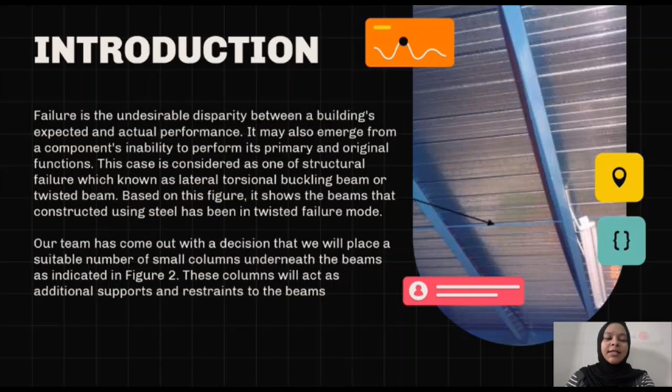Based on this figure, it shows that the beams constructed using steel have been in twisted failure mode. Therefore, our team has come out with the decision that we will place a suitable number of small columns underneath the beams as indicated in figure 2, and these columns will act as additional support and also restraint to the beam. Next, we'll move on to the metric investigation.

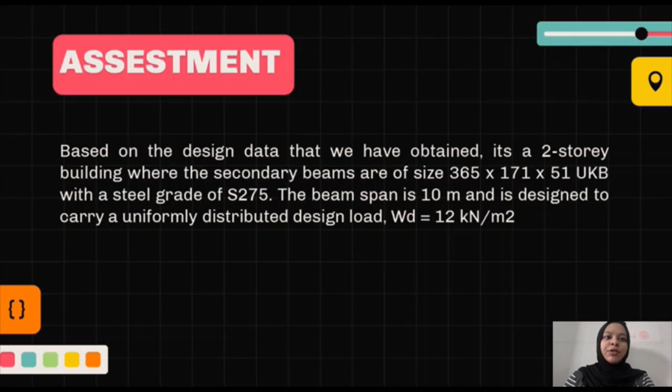For this assessment, based on the design data that we have obtained, it is a two-story building where the secondary beams are size 356 x 171 x 51 UKB with a steel grade of S275. The beam span is about 10 meters and is designed to carry a uniformly distributed load of 12 kN per meter square. As for the material evaluation, steel is a ductile material, hence even though the load has been predicted, forces in different members have been calculated and designed to resist particular forces. However, it still tends to fail due to some unpredicted load that makes the force in certain members increase to a value which it cannot withstand.

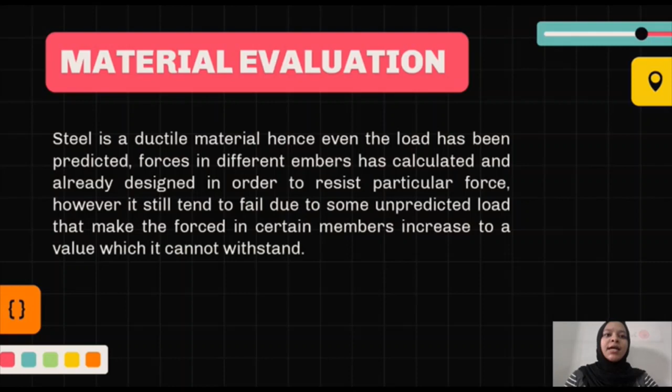As for the hypothesis of beam stiffness, for many different types of structure, especially those with slender geometries, the idea of beam stiffness is crucial. Large deflection as well as significant localized stresses and the possibility of failure in that area might result from insufficient beam stiffness. Such construction may also be vulnerable to torsional moments, which are twisting moments. In addition to bending moments or torques, the product EI is a measure of how strongly the beam resists deflection under bending moments. For a given material, the beam stiffness is maximized by maximizing the value of I.

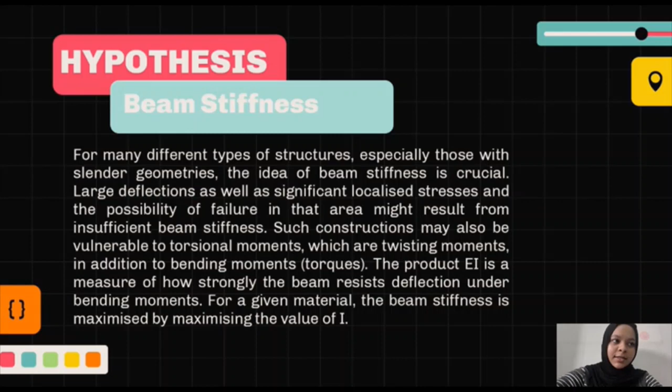The next hypothesis is that the compression flange of the beam is not restrained. The main cause of the torsion is when the compression flange of the beam is not restrained. We believe that when we apply a load to a beam, it is applied precisely at the beam center. However, this is not always the case in practice. The loads are present on the floor and these loads are always eccentric. Because the flange of the beam is not fixed, this eccentricity causes a twisting moment that causes the beam to move laterally as well as twist.

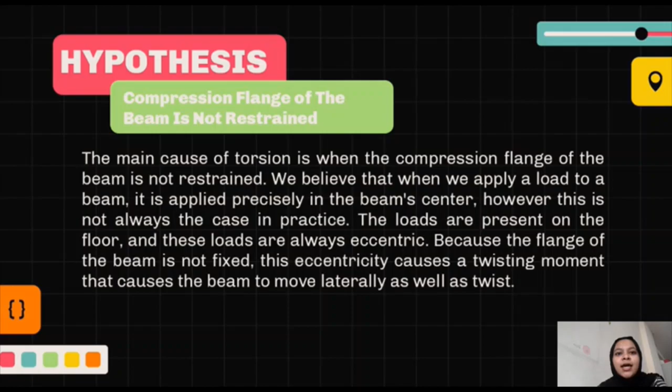Today I will present the calculation part of this project. For the calculation part, we have two methods, which are the moment distribution method (MDM), and the second is the critical bending moment (MCR). For the MDM, we have several steps. First, calculate the member stiffness. Second, calculate the DF. Third, calculate the carryover factor. The fourth step is to calculate the FEM, and last, prepare the distribution table to summarize the final moment.

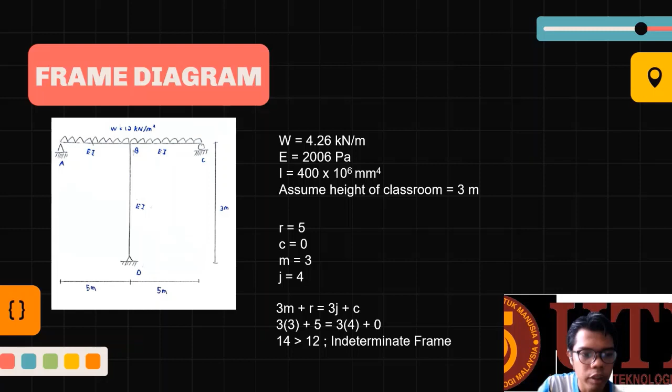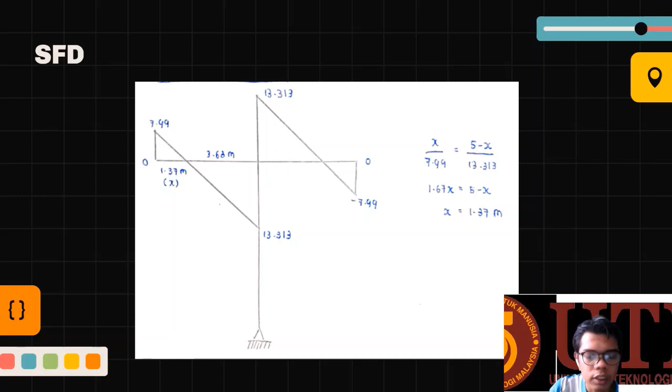In this diagram, we can see the frame diagram. With our group calculation, we determined that the frame is an indeterminate frame, and our group proposed for the framing diagram to be one column with a pin and moment. Next is the calculation part for the FEM. After the calculation of FEM, our group used the table to get the final moment at every joint, and from there we find the reaction at every joint, and we sketch the SFD based on the shear force diagram.

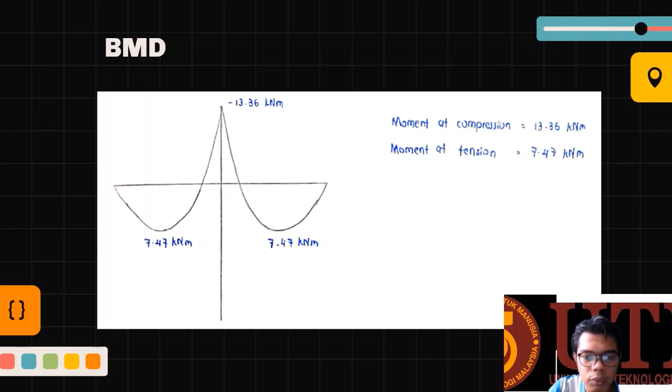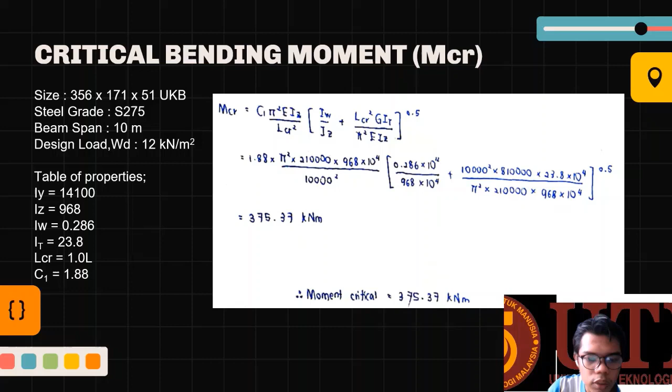Next, we sketch our bending moment diagram and find the moment at compression, which is 13.36 kNm, and the moment at tension, which is 7.47 kNm. The critical bending moment (MCR): in this project, we use the size of 356 x 171 x 51 UKB with a steel grade of S275. The design loading is 12 kN per meter squared, and based on the table of properties, we get our MCR, the critical moment, equal to 375.37 kNm.

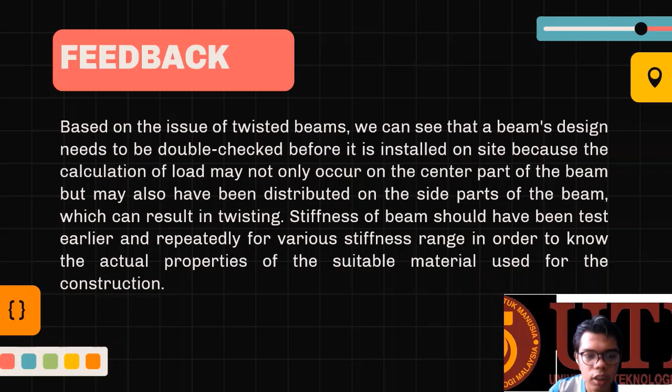Moving on to the discussion part. Based on the issue of the twisted beam, we can see that a beam design needs to be double checked before it is installed on site, because the load may not only occur at the center part of the beam, but may also be distributed on the side part of the beam, which can result in twisting. The stiffness of the beam should have been tested earlier and repeated for various stiffness ranges in order to get the actual properties of the suitable material used for the construction.

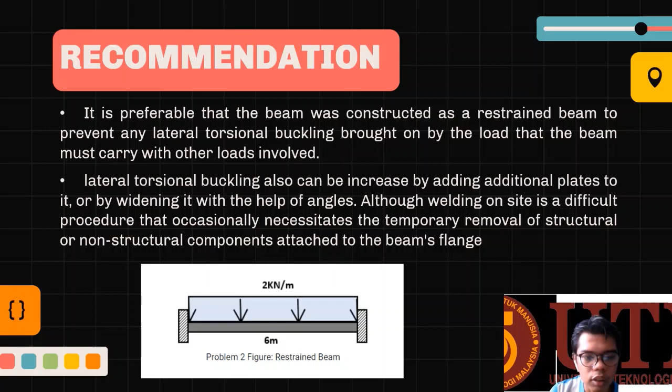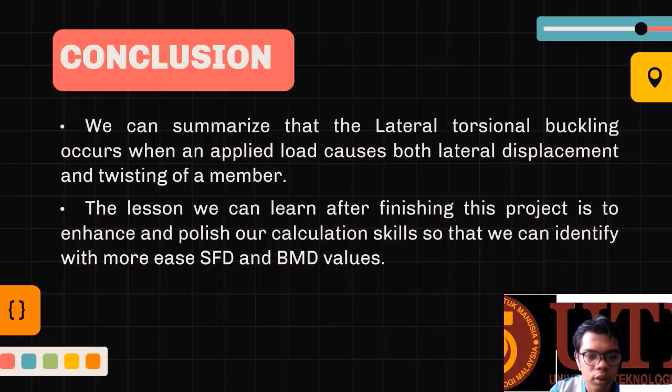Our final value for bending moment at tension is 7.47 kNm and at compression is 13.36 kNm. By comparing to the MCR value, which is 375.37 kNm, we can conclude that adding one column as a support to the beam with the same size can be accepted and can prevent the failure from happening.